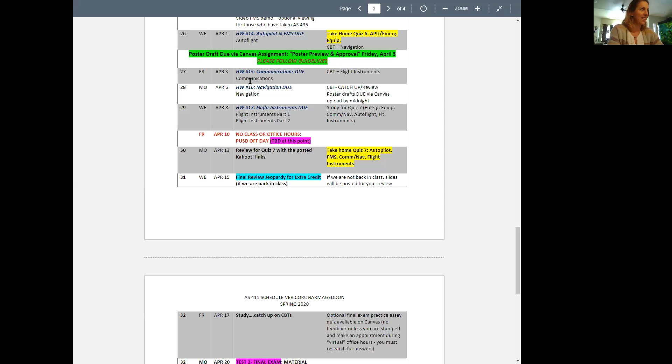Anyway, we can't really play final review Jeopardy, so I'm just going to post the slides and kind of go over them in my review. And then this study / catch up on CBTs on Friday, April 17th was mostly just so you guys could come by my office and get help with the posters, which are no longer necessary. You remember the contingency plan for the poster presentations? I've eliminated that, so as of tomorrow I'll probably be posting a new schedule for y'all.

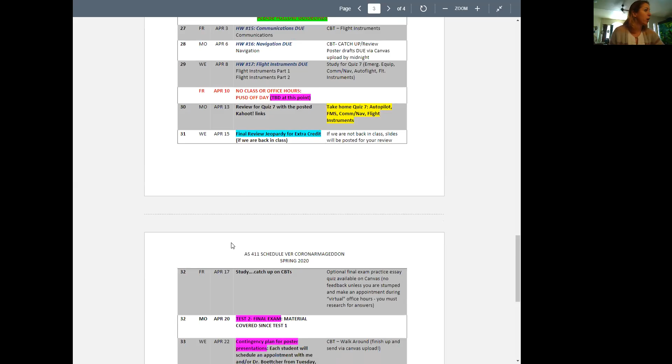And I'm going to send out in an announcement a request for any kind of extension requests. But I think what I'm going to do is move the final exam up. So where we would have done the study day, April 17th, that'll instead be your final exam, at least for most of you.

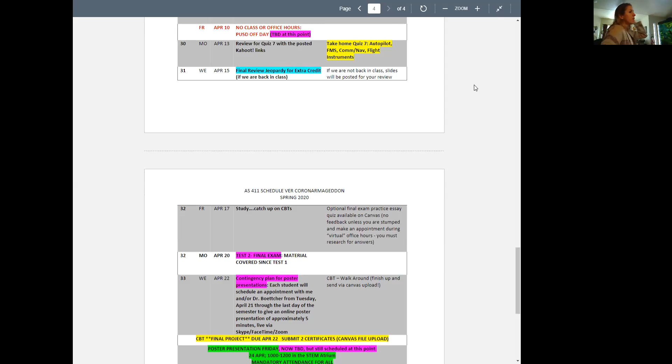Professor, for that, moving the exam up, can our CBTs still be due like after when they're supposed to be due? Yeah, the CBTs need to be due by the end of the semester.

I've been considering different ideas because this final exam is going to be timed. I'm actually seriously considering just making a huge bank of essay questions so that no two people will really get the same combination of questions. And then the other questions, I was just looking at your final, there's approximately 10 questions out of each question bank. So quiz 5, quiz 6, and then quiz 7, which used to be 2 quizzes, so it's actually quiz 7 and 8 together. There's 40 questions right there that are multiple choice, and there's a huge bank in each one of them.

So what I might do is make your final like a take home on your own time, but due no later than, say, Monday, April 20th. Does that make sense? Yeah.

Like I'll open it up. And what would the timing be if you change it to like fill in the blank? Well, like short answer, I'm not sure yet. I'm gonna have to really take a good look at it, but I think probably give you about an hour and a half, maybe, depending on how many different essays I choose.

What I have to do, this is my own personal standard, I have to up the level of difficulty just a little bit because of the fact that you can have Kahoot open, you can have your slides open. I mean, everything is fair game. I can't limit you to a Word document because we're not in class together. So let me think on that.

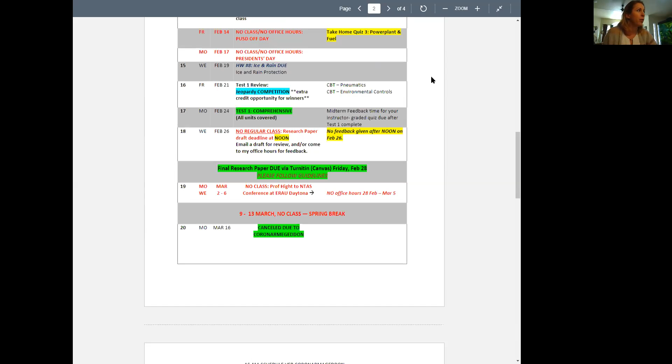That's you too, you are the most accommodating professor I have. Well, I'm also the one struggling the most at home with 2 kids, so I can kind of relate to y'all. The fact that my husband practically has them tied up right now in the garage for lectures. So thank you, Jimmy, I appreciate that.

So let's talk real quick, this is actually a pretty quick one, I want to say. Not that quick, most of these slides, if you look through them, cover every single mode of the autopilot. They talk about it, just like the CBTs.

So I'll hit the highlights as I always do and point out questions where I've pulled quiz and especially essay questions out. I'm going to pull my browser over here.

You guys can't see the browser right now, can you? We can only see the PowerPoint. Okay, I'm glad, because I'm actually going to pull open your final exam, and I'm going to make sure I hit all the highlights on the essay questions that I've created thus far. I may create a couple more, but I will not leave you hanging on what to study.

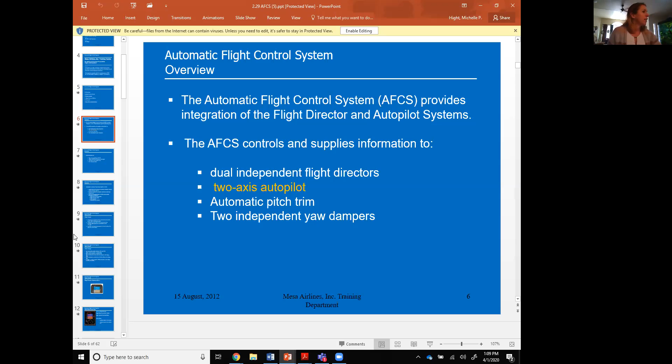So autopilot, obviously it's 2-axis. You've got pitch and you've got lateral. All right, that's about as simple as it gets. This is not 1918, so we actually have pitch and lateral. You get all of these different things, and remember what these acronyms stand for.

FCP is your panel. FCCs, those computers, you have 2 of them for redundancy, and when you push the button to engage a mode, the 2 lights go on the outside, this is another one I'm going to add to the essay bank. When the 2 lights go on the outside of that button, anyone who's studied this should know what that means, right?

Does that mean you're actually engaged? Does it mean the FCC has pretty much agreed to it, or they thought it was within parameters or whatever? Right, so the word I'm looking for on the essay question will be: the FCCs have acknowledged your input. So those 2 lights on either side of the button mean FCCs have acknowledged your input. That's it.

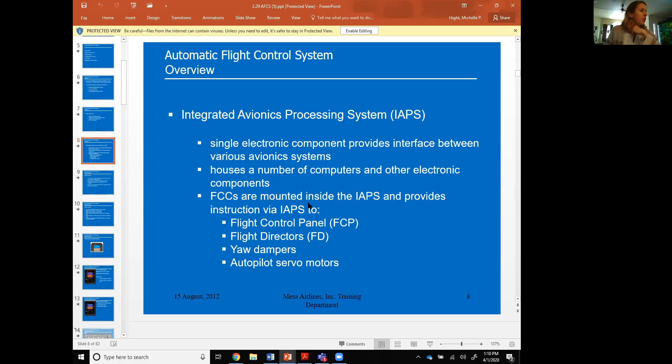Autopilot servo motors, sure. And then yaw dampers are necessary for the autopilot to engage. You've got an IAPS system with all of these things. Basically, it's an interface - it's pure magic. There's computers, electronic components, and it translates all of that into the motion that controls the airplane.

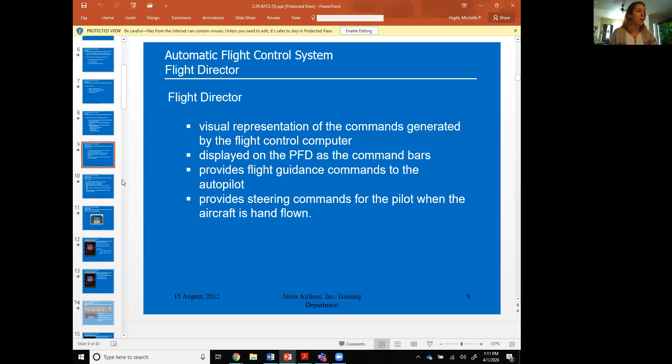Flight directors are weird to me. I've never been a big fan. I feel like they've always been kind of clutter, but those command bars that come up, that's your flight director, and that's how they're displayed on your PFD. It gives you steering commands, and the Mesa Airlines instructor really hammered the fact that each co-pilot needs to know all the modes of the flight director, what it's doing when you hit TOGA. There's been confusion in training, and that was kind of an emphasis item, understanding the flight director. So because he emphasized it, I'm going to emphasize it as well.

So you get 2 independent flight directors, FD1 and FD2. Basically, 1 controls 1, 2 controls 2, not that hard to remember. And then you can actually transfer the flight directors by pushing the transfer button on the flight control panel if you want to.

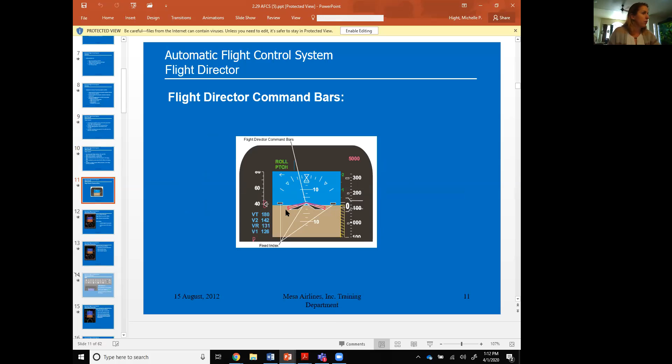Here's a picture of it. This is kind of an antiquated picture, but that's what it looks like - a little digital magenta bar, command bars. Like I said, in the C-130 they're kind of rudimentary, not exactly perfect, so I never used them. In the E model C-130, this will make you laugh, the flight director bars were actually pieces of plastic. You could hear them click. It was really awkward.

Nowadays, this technology has improved greatly. So on your PFD you've got all these things, including a flight mode annunciator. This is the most important emphasis of this whole lecture, and what I want you to get out of doing your CBTs is there's a couple of things you need to know about the flight mode annunciator. We'll get there in later slides, but here it is - this is what you have engaged. It's green, and it's on the left side of this little blue bar. They call it the fence at Mesa.

Lateral mode is always the top line. That's a quiz question, that's a final exam question. So lateral on top, vertical on the bottom. You can remember that - if anyone knows autopilot history, lateral mode was the first one invented. Before they had vertical mode, they had lateral mode. Altitude hold was only invented, I want to say, sometime around the late 50s. You can call me on that fact, but I believe lateral was the first one invented, vertical was secondary. So remember, that's on top, that's on the bottom.

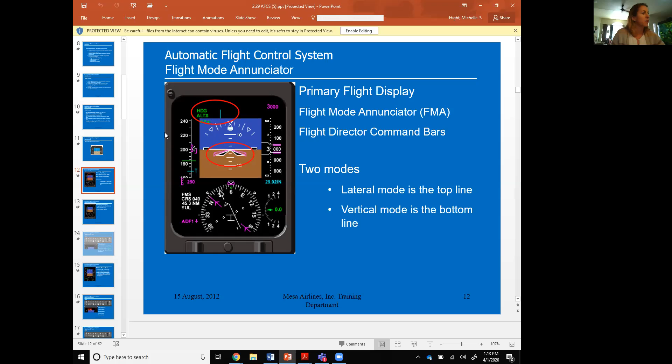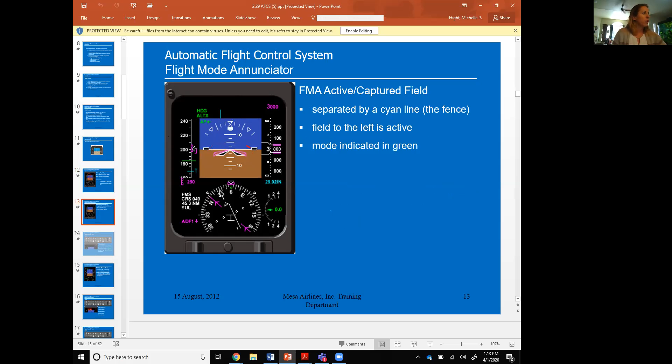As far as the captured field, this cyan line is called the fence, and the field to the left is what you actually have engaged. If you have something on standby, it'll be white and on the right side of the fence. I don't know why I hid this slide.

Okay, moving on, captured field. I don't really care that you know it flashes green 5 times, or that it's 5 seconds, but it is in the bank of questions. Just so you know, I did see that one in, I believe, quiz 6, the one we haven't done yet.

So the field to the right is the armed mode, which is white - ALTS, for example. Right now we have climb mode, and ALTS mode jumps the fence, flashes green 5 times, and then becomes active once you reach your programmed altitude. Makes sense? So we're at 10,000 feet here and we have 15,000 feet programmed. It'll hop, you'll stop seeing CLB 268, and voila, ALTS will be green.

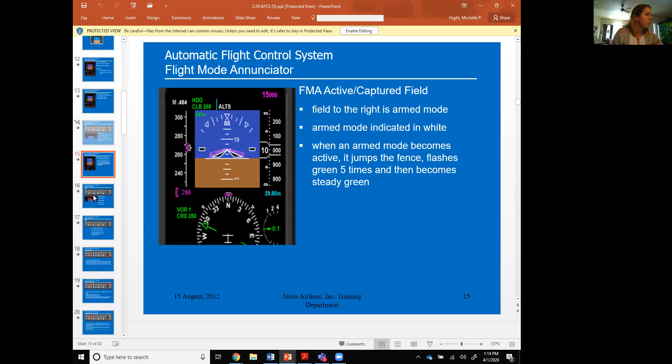The FMA display - obviously lateral, vertical, active, and armed. This is, once again, me hitting this as hard as the Mesa instructor hit this, that's all.

And then you've got - so this right here, we're looking at the FCP, the flight control panel. You guys should probably know vaguely where it is in the airplane. You've got your posters, right? So when you have your tests and quizzes, the posters come in handy to show you the location of the panels. Hint, hint.

So the left side of the light is FCC1 and the right would be FCC2. When it's illuminated, it's acknowledged the input and conditions are met.

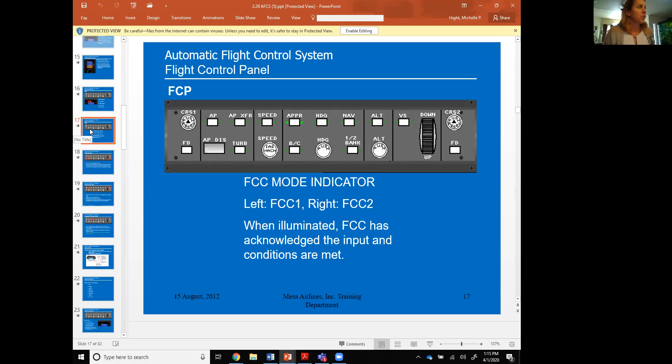So if you have this airplane in like a 45-degree bank, got your foot on the rudder, and you got it all out of trim, and you try to engage the autopilot heading mode or make it go to ALTS capture, it's not going to acknowledge you and it's not going to engage. Autopilot's kind of, depending on the airplane, can be really tricky to engage. In the E-model C-130, we had to have it trimmed up just so, within 1 degree of perfectly level, and then engage the autopilot. This one's a little more forgiving.

Here's your flight director buttons, basically the active flight director. It removes the command bars if the autopilot's off, if you push that button. Pressing the flight director push button does not disengage the autopilot.

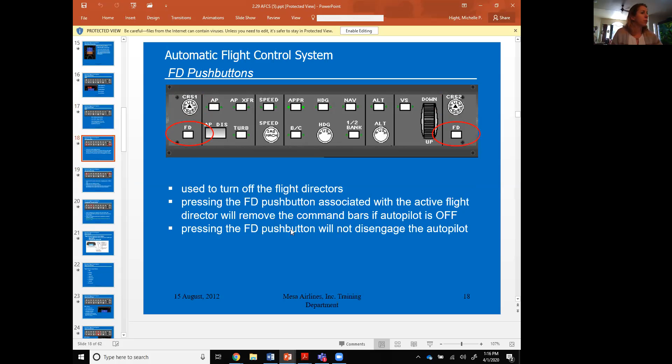These, you're very familiar with, course select knobs if you're in instrument phase, which all of you have been through, hopefully. Push the center of the knob and the course pointer points directly to the station.

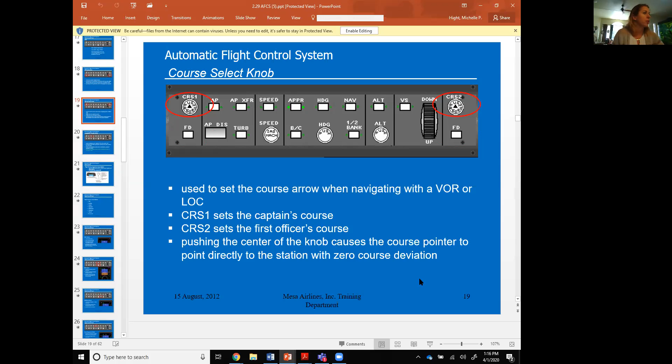Autopilot transfer. The way you should think about an autopilot, if you've never flown with one, it's like a human pilot. If I'm sitting in the right seat flying the airplane, my autopilot has to be engaged. If I get up to go to the bathroom, I have to transfer aircraft control to the pilot, and he or she has to take the autopilot and engage it on his or her side. So it's very important to have the autopilot transfer push button. It basically transfers the active side to the first officer. No matter what, whoever's sitting on one particular side has the autopilot.

And personally, even though you've got a really advanced jet here and the autopilot's great, you still treat an autopilot like you've given the airplane to a toddler. Anyone who's had a toddler understands you don't just walk out of the room and leave it alone. So it's really important never to leave an autopilot alone, or really a co-pilot alone with an autopilot.

I don't know if I told you guys the story about my co-pilot. I was a new aircraft commander. Nice guy, sitting in the right seat. He was actually a really senior co-pilot, knew what he was doing. So I went to the back to have a brief conversation with the loadmaster.

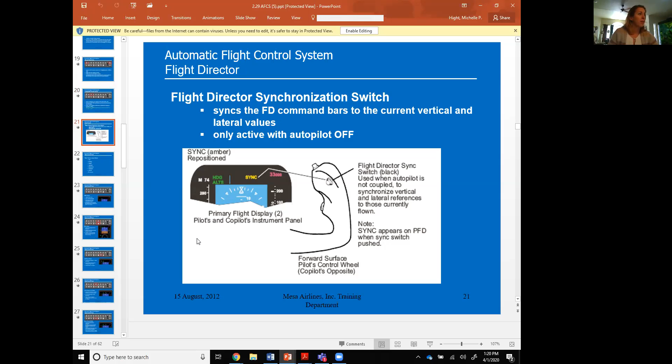That's when you're hand flying. I can't imagine a time you'd need to do that. Just kidding, you'll hand fly this airplane from time to time.

Okay, so here's your lateral modes. There's a lot of them. I don't expect you to memorize all of them, but we're going to go over them one at a time. The one I mentioned as part of your essay for your final is this half bank mode. The half bank mode can be a little bit confusing. I want you to study that one in particular.

The rest of them are pretty straightforward. You get the roll mode, you get the heading mode, approach. Back course is different than approach. And then obviously you're going to spend most of your time in the nav mode. This navigation mode is how you do lateral navigation in the airplane because you've got your FMS all tuned up with your route of flight.

And then takeoff, go around. The roll mode is your default lateral mode. If you set the autopilot, it'll start in roll mode. So it'll roll you wings level if you're less than 5 degrees.

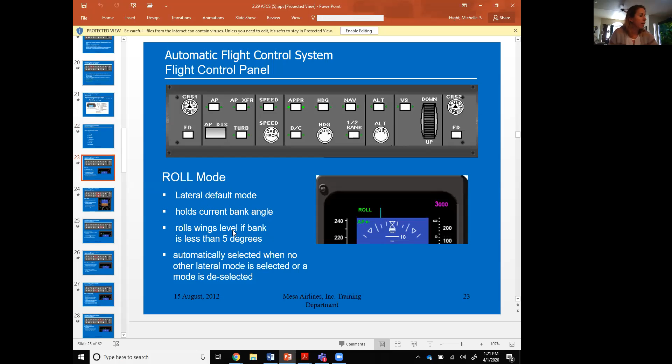Pretty much it. If you want to program in a heading, say you're taking vectors, easy peasy, just push the heading push button and then start rolling your heading knob.

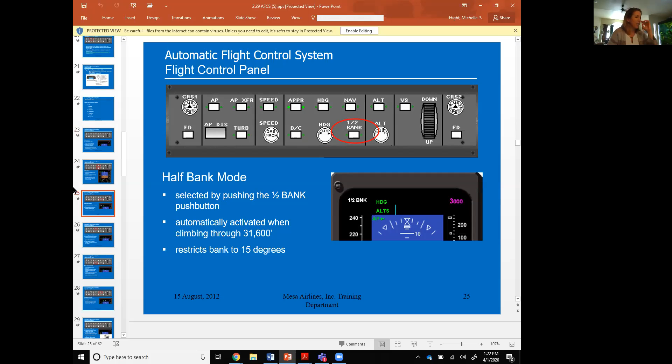Half bank mode selected by pushing the half bank push button. For some reason, 31,600 feet is what the aircraft designers have assessed as an automatic half bank mode. So at that altitude, performance-wise, the airplane needs a half bank instead of a full bank, and it restricts you to 15 degrees. This is only on the autopilot. You can always grab it and kick the autopilot off and go 60 degrees. Just kidding, I didn't say that.

Back course mode, obviously when you're doing a back course ILS, you still set the front course for proper orientation.

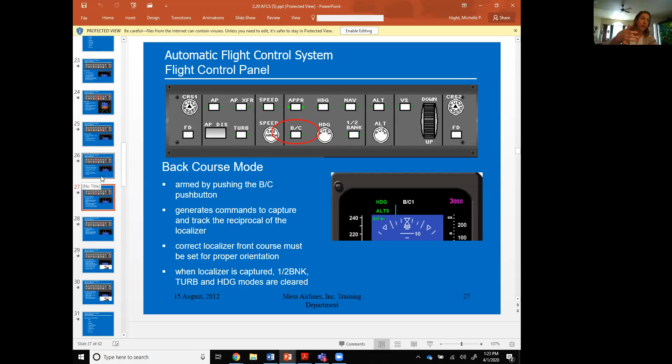So this has been, actually last semester I caught myself teaching this wrong, so I want to teach it correctly now. If you capture a localizer, say you're on the approach, anytime, this half bank, turbulence, and heading modes are all cleared. That means you have a full bank authority on final approach. So if it needs to capture the localizer and you're off, it's going to go ahead and take you straight to 30 if it needs to.

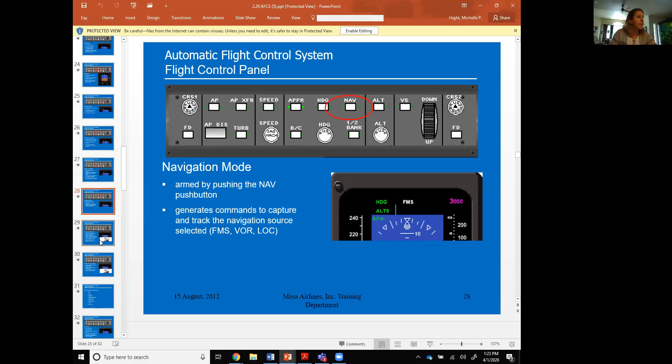Okay, lateral takeoff mode, all it does is command to hold heading at the weight off wheel signal, and it maintains your heading. So you know, if you're flying into IMC, this is pretty handy. It keeps you oriented to a certain extent.

Lateral go around mode does the same thing, generates commands to hold current heading. It's trying to keep you from drastic control inputs right after you take off, or if you're going around.

Vertical modes are pitch, speed, approach, pre-select altitude, altitude hold, vertical speed, takeoff and go around. And unlike a C-130, the pitch mode and the speed modes work flawlessly in this airplane. If I were to put speed mode on a C-130, it would hunt around.

So say we're in the climb and I want to climb at 180 knots. If I were to select 180 knots in a C-130, my nose would do this the whole time. You'd be sick. In this airplane, I'm just a slight bit because the pitch mode works beautifully.

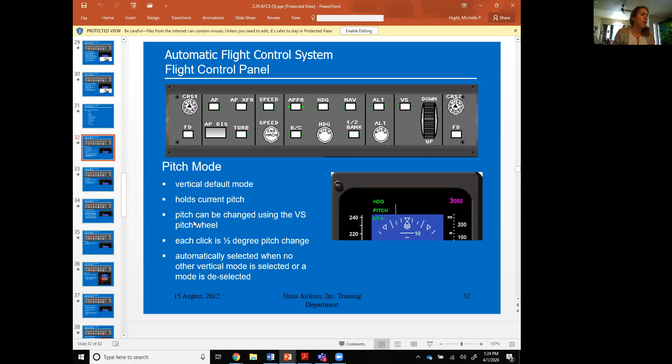If you have a certain pitch that you want, this one's a little bit more rare, I would say, pitch mode, but speed mode is what they use in the airlines 99% of the time.

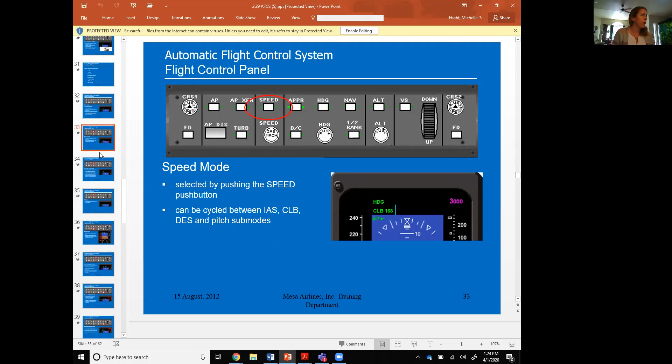So what you'll do is you'll want to climb at, say, an optimum climb speed that your FMS has calculated for you right here. You engage the speed mode about 400 feet after you take off as you're cleaning up, and you climb all the way to whatever pre-selected altitude you have on speed mode.

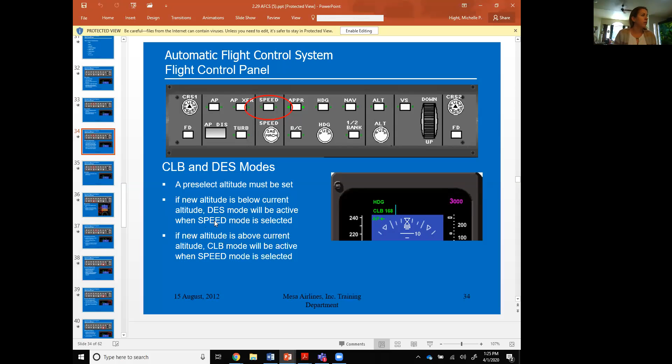Climb and descent is also really, really handy because you have to say you're descending on an approach to, say, 3,000 feet like this one, this set. If you have a new altitude that you've already dialed in that's below your current altitude, you have a descent mode active and speed mode is automatically selected, which is great.

Beautiful system, so easy. You guys have it so easy. It's okay. Slightly jealous.

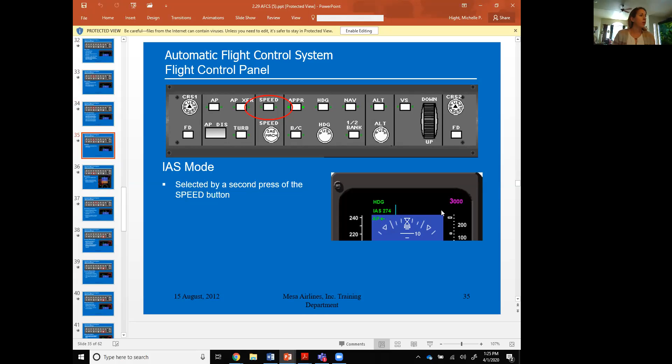Okay, you can do an indicated airspeed mode with a second press of the speed button to keep yourself at a set speed. Say you have a speed limit, which happens a lot, especially in European airspace. They don't want you above, say, 190 or 210, whatever it is. You can actually hit that button twice and select a specific speed.

Speed knob changes the bug speed, that's all it does. Stop me if you have questions.

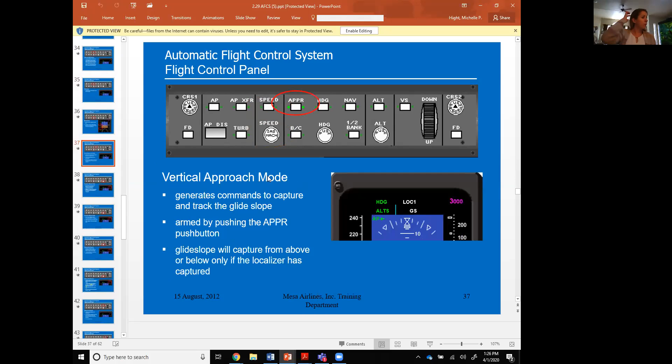Vertical approach mode, easy enough. It captures the glide slope. You're gonna fly a lot of coupled approaches in the airlines.

Pre-select altitude mode is easy enough too. You just set your altitude that you want in this magenta box, and voila. Like I said, 9 times out of 10, you're gonna be flying some form of speed mode, whether it's climb or descent. Okay, and then ALTS CAP will flash, come over here and capture the altitude.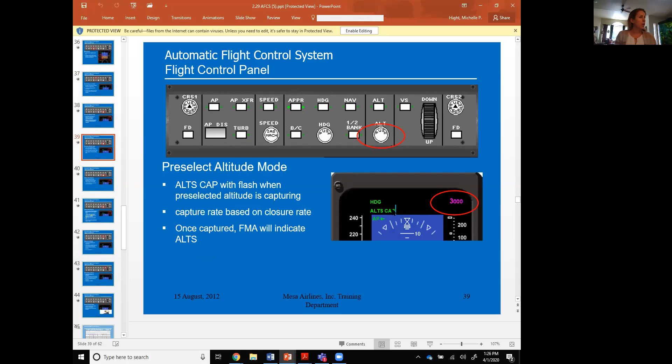The altitude alert system sounds a really pretty C chord. It's like ding, ding. It's really soothing. You hardly even notice it, but it sounds at 1,000 feet from your pre-selected altitude.

And that's just normal. The C chord also sounds, and this is a quiz question, if you are deviating more than 100 feet during altitude acquisition. So if something's not working, and say you've captured an altitude and it's 200 feet off, something's not working with the autopilot, it alerts you with the C chord. Also, your altitude bugs and your selected altitude will flash. Hopefully you're awake enough to realize that.

Slide 41 is kind of important in terms of quiz questions. Take another look at that.

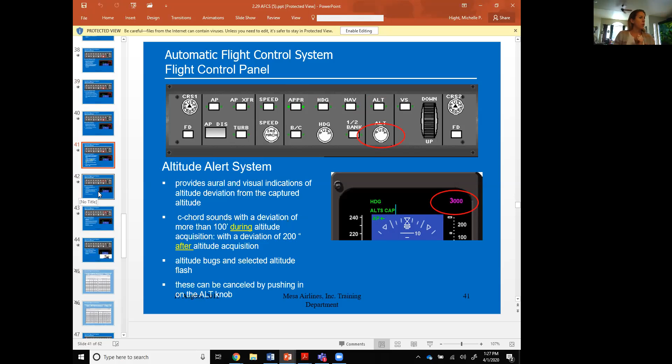Altitude hold mode, again, pretty easy. It just holds your altitude that you have selected.

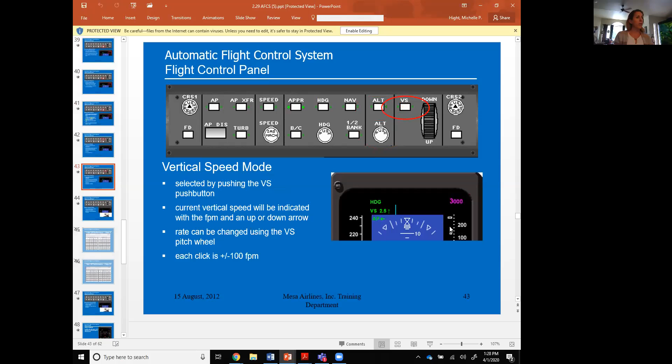Vertical speed mode, another one that you might need if ATC says max climb to X, Y, and Z, or maintain 3,000 feet per minute. This happens all the time. Lots of conflicts in Class B airspace. Someone's coming underneath you, they need you out of the way. You may have to engage the vertical speed mode to climb as fast as you possibly can. So you roll this with your thumb up or down based on what ATC tells you to do.

Never be afraid to tell ATC if you're in a beast like a C-130. I had to tell them all the time, unable, and basically have them route people around me because I couldn't climb that fast. But CRJs are like little sports cars.

These things are, whew, you've probably flown in them, probably all of you. They climb like a beast, I mean, like a cheetah. What climbs fast? Give me an animal. Not a sloth, the opposite of a sloth. Climbs like a hawk. I was watching a little hummingbird zipping around outside, I was like, man, that thing is awesome. What would you compare to a hummingbird? Helicopters, because they shouldn't aerodynamically be possible. Exactly, hummingbirds just amaze me.

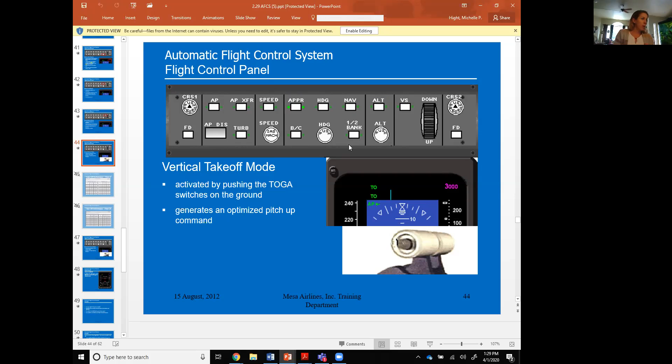So vertical takeoff mode, if you push TOGA switches on the ground, which is what you do every single time you take off, when you take the runway and you're on the numbers, or you hit the toga button, the first takeoff of the day, it actually recages your FMS, and we'll talk about that at length, I believe, in the CBT. It tells your FMS, yep, we're on the runway, toga button, and then reinitializes all your location. It gives you a better solution, basically. It also serves the purpose of optimizing a pitch up command for you.

I don't know what these hidden slides are. Oh, interesting, I must have hidden these because these are company specific takeoff performance. This is what you'll see.

Wish I could show you a picture of the inside of my cockpit. We had a grease pencil and like a white dry erase thing. The flight engineer had one of those black metal clip things, and he'd put it up there and write down the performance data. We'd have basically 3 numbers: takeoff, climb, and approach speed, and touchdown speed. I guess that's 4 numbers.

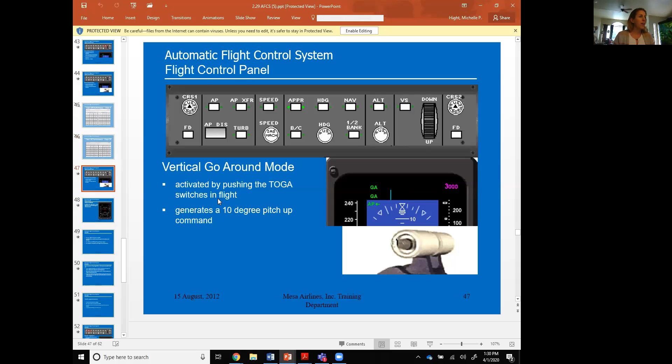In this airplane, all of your takeoff data and all of the important numbers are actually bugged, color-coded, and presented to you on your PFD, which just blows my mind how amazing and convenient that is. So anyway, you don't need a flight engineer because of all the new technology.

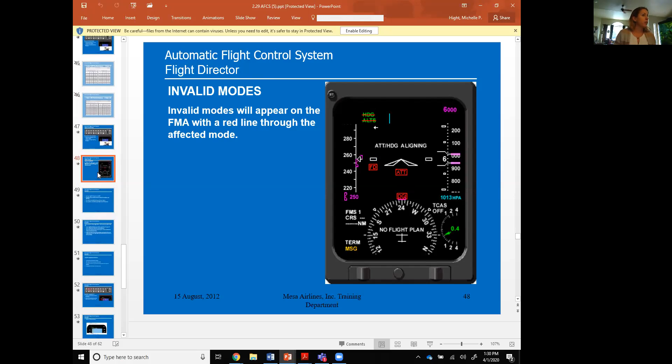Invalid modes have a red line through the affected mode. This is a malfunction, you should not see this. If there's, say, a power loss, you will see these red things, attitude and heading aligning. It's also a pretty bad day. You'll be flying on your standby instruments while you're aligning. Talk more about aligning in just a sec.

So rudder needs the yaw damper system. You can't engage the autopilot without the yaw dampers, and the autopilot is controlled by those FCCs.

What they mean by a fail-passive autopilot, does anyone know what that means? Fail-passive? No?

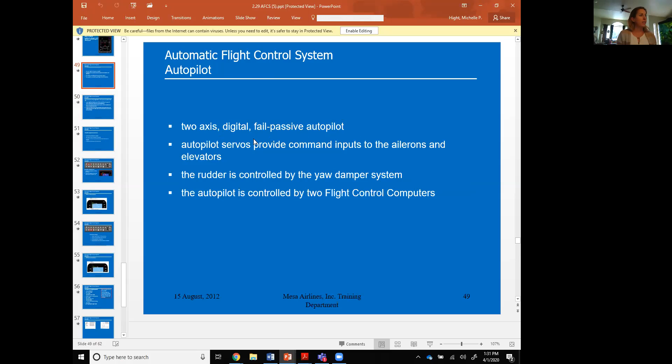Here's what it means. Basically, the FAA has mandated that if you're on the autopilot and you disengage it for whatever reason, the airplane should not and could not put you in an out-of-trim condition that you can't control. It's almost like an aircraft designer limitation.

So for example, does anyone know from commercial ground? I think I taught commercial ground and taught this. Do you know how much weight, technically, you should be able to put on the rudder? Like what's the maximum amount of weight on a rudder if you fail an engine on one side? Anyone know? 150. Who was that, Jimmy?

Oh my God. Yeah, 150 what? I was going to say 11 pounds. 150 tons? 150 pounds. So, tons? You know what that says to me? I mean, I don't even weigh 150 pounds.

Technically, if one of my engines fails, I have to put more than my body weight on the rudder to control the airplane. Let that sink in for just a second. Aircraft designers are not allowed to create an airplane that is basically uncontrollable, so you'd have to put more than 150 pounds on the rudder. I found that 150 pounds seems really high actually. Why isn't it lower? It's not that high, to be honest with you.

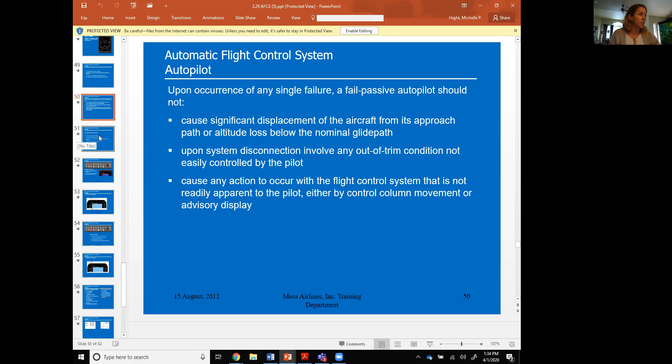So any action that's not readily apparent to the pilot -- it has to give you an advisory if it's putting you in a situation, like if it's moving the controls. This is an FAA requirement.

So long story short, here's the bottom line: you don't want your autopilot to be able to kill you. Wow, no shit, I know. But if you left it up to engineers -- no offense, I love you all -- they wouldn't think about you, the pilot, so much. They'd probably just design the optimal airplane, not thinking about all the things that could happen.

So engagement parameters: you have to have at least one yaw damper. If you push those two yaw damper buttons, that'll actually disengage the autopilot. Both FCCs have to be operable. The horizontal pitch trim system has to be engaged, at least one channel.

And then you can't be in the crazy bank, which is what they tried to fix with that MCAS system. They tried to fix what was going on by engaging the autopilot, and they were too far out of trim at that point.

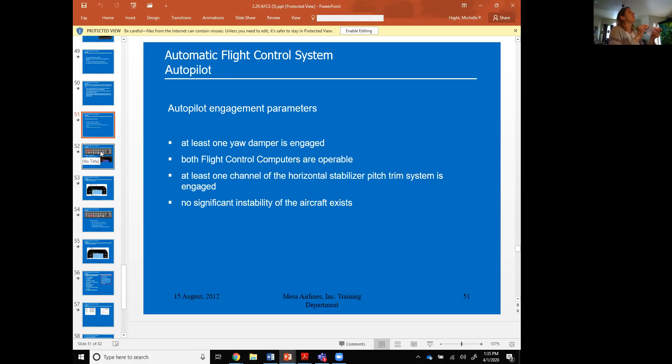About to sneeze. Dang it. If you say you're about to sneeze, you never can.

Okay, so autopilot engaged, you need to push this button to begin with. Before you select any other mode, you have to actually engage the autopilot. I know, rocket science.

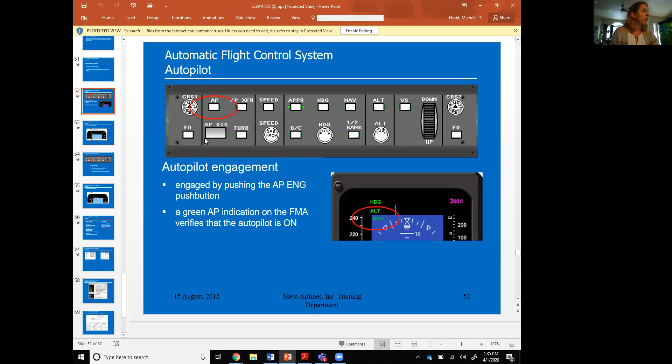There's one basic button, and then there's a big button here for the autopilot disengage. There's many ways to disengage the autopilot. I won't get into autopilot out-of-trim -- yes, there are out-of-trim indications if that happens, but it's very rare.

Turbulence mode is important -- it just reduces the autopilot gain. In other words, it won't overcorrect for every single gust you encounter. This clears when you're engaged on the final approach course. Here's your autopilot disconnect -- you'd probably never even notice this. When you disengage the autopilot, it gives you this red AP indicator.

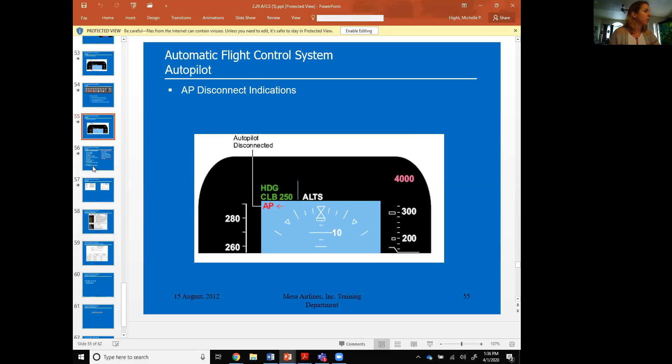And then, so yeah, I'm actually trying to see if I ask you this. Hang on. Nope, there's a couple of parameters on quiz 7. It asks you to name 3 ways.

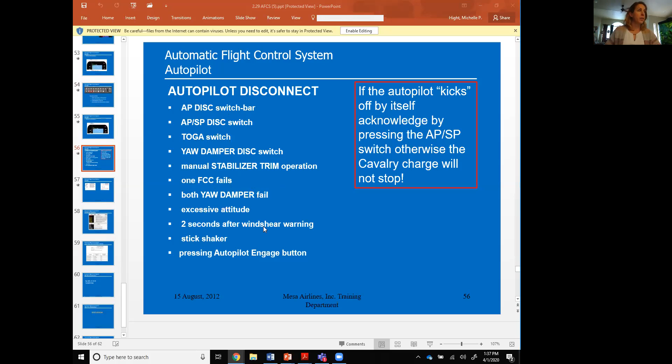There's a matching question, multiple answer question, 3 ways you can disengage the autopilot. That's it, so you don't need to memorize all of these, just the highlights, like the toga switch, obviously the disengage switch. Both the yaw dampers fail, or one FCC. So when you go to the airlines and get a job flying this airplane, I'd expect you to know each and every one of these, but for this class, just 3.

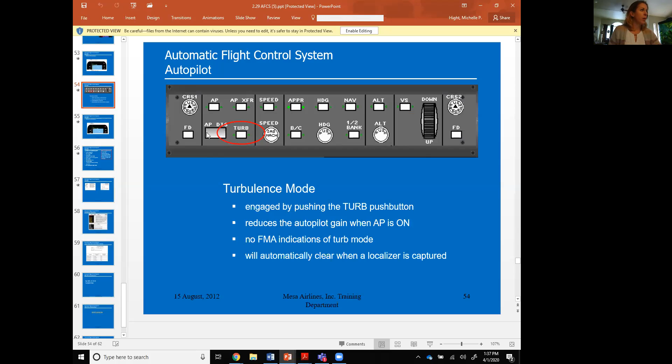Here's another way to disconnect. You've got a red autopilot disengage button right here on your yoke. Once again, let me remind you, you've got an autopilot disengage button on your FCP. The toga switches will disengage it, and it'll give you a cavalry charge. It's like a, I can't even make that sound, sorry. I would try, but I would fail at it.

And then, so abnormal autopilot operation, AFCS message fail, you're gonna wanna go ahead and disengage the autopilot. And then config autopilot, these are your 2 main warnings. Autopilot engaged on the ground is bad, especially with engines greater than 70% N1. That means you're basically trying to take off with the autopilot pre-engaged, and that's a big no-no, so it'll give you an aural warning for that one.

Notice the 1 and 2 inhibits are not present on this warning, so they want you to get that warning if you're on the ground ready to take off. And then you remember the out-of-trim indications with the little yellow boxes, those generate cautions.

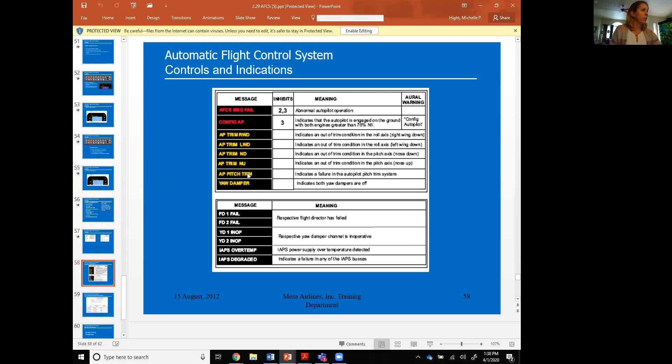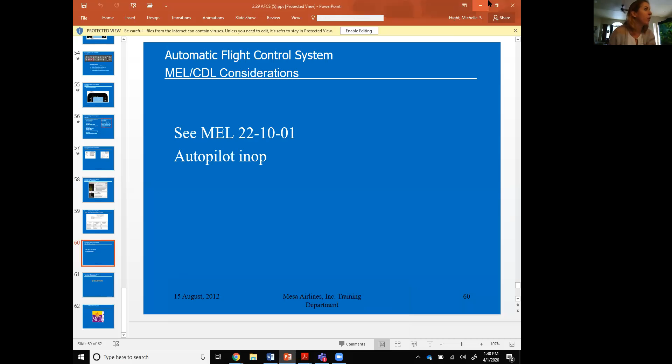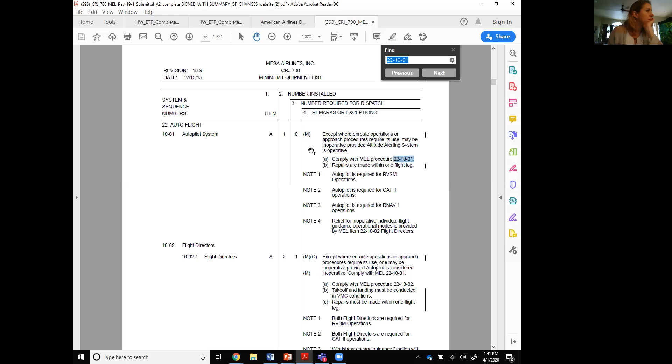While Michelle's finding that, are the pilots, is anyone leaving since the flight line is shut down? Is anyone going to go home? I've left. Alex and I are. Yeah, you and who said that? Isaiah? Yeah, you guys are going to go home? Yeah, on Friday. Nice. I've been home since spring break, and my instructor's like, 'Oh, when are you coming back? The training manager wants to know.' And then I was like, 'Well, now that this whole thing's going on, probably not.' They all want to know, that's when you just say, 'I'll be coming back when the coronavirus situation has been officially ended.' It's funny, he was asking when I was going to come back, and then I gave him a response, and then like one day later, they're like, 'Oh, we're shutting down.' And I'm like, 'Oh.' Is anyone staying around?

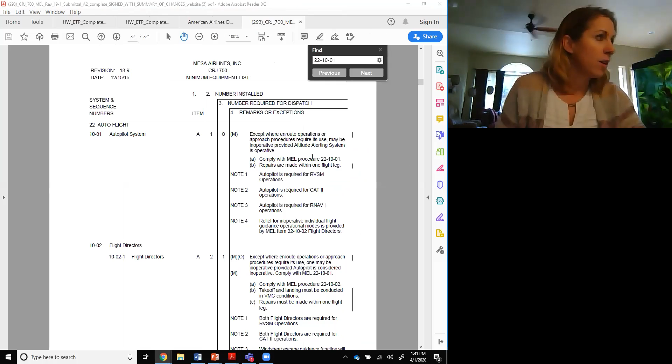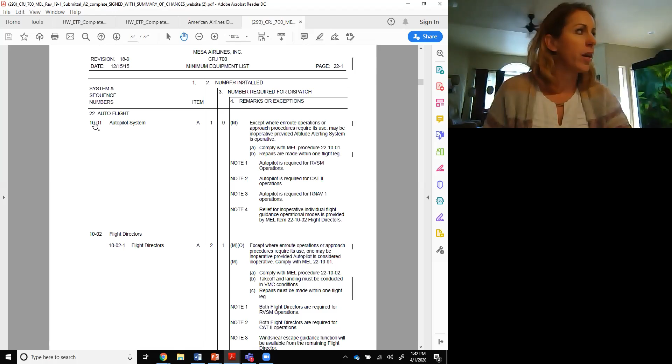So how you read this, you go to Autoflight, otherwise known as Autopilot. Look at the number required for dispatch. You can actually fly this airplane with no autopilot. I know, shocker. Except where you have to have it, like RVSM operations Cat 2 and 3. If you're not going to be qualified to do Cat 3 in this airplane, that's why it only says Cat 2. And then you're also required an autopilot for RNAV, of course, over water, as you remember from AS350. So, questions on the MEL?

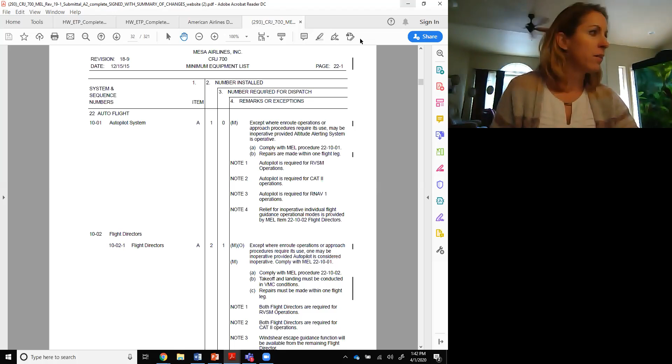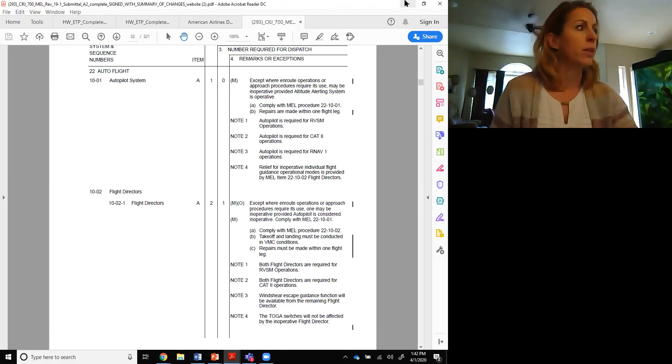The other thing it does, which it doesn't say here in the MEL but could say in crew procedures, is that it will limit your duty day. Flying around, hand flying off autopilot in a C-130 limited our duty day to 10 hours. And believe me, 10 hours is a long day with no autopilot.

So, questions about autopilot, flight management system, any of the homework before I stop recording? Michelle, I have a question, just because I think it might help everyone. I just wanted to confirm that the FD is optimized between 11 and 12 degrees to obtain V2 plus 10.

Are you looking that up right now? Well, yeah, I have the book, the Aircraft System Study Guide. It's actually, well, V2 plus 10 is your optimal climb speed, yes. So is that the answer you're looking for or not? It's the ratio of two speeds.

Can't find that? Is it VR and V2? It is. No, it's V1 and V2. Oh, dang. Yeah, you know, I believe it goes through it in the CBT. I may be wrong. I'll try to find the exact CBT slide that talks about it. If I can't find it, by God, I'll delete that. This just says that degrees is optimized to obtain V2 plus 10, plus 10 is your climb out speed, yeah. But I'm not seeing anything about the ratio of those two.

I see why, Isaiah, you said VR to V2, because on this one it says, explain the optimized pitch of the flight director, and it literally says flap setting in the ratio of VR to V2. Yeah, that's what I was referring to. I read that last night somewhere. Okay, yeah, go with Alex's answer. I'd have to look it up, actually, right now. So is it V1, the ratio of V1 and V2? Is that what it says, Alex?